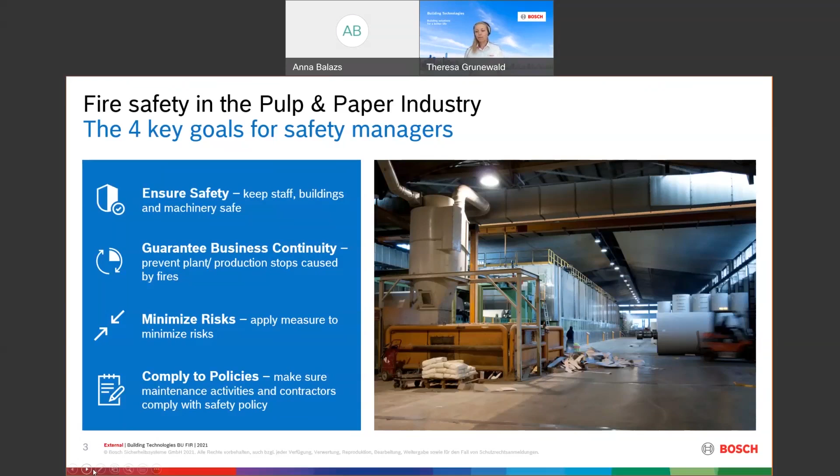To give you a better feeling of what people told us, I've got two quotes with me. One quote is from our official reference, a paper company in Ecuador, IncarPalm, where the guy talked about business continuity and long-term cost savings, and hence installing a cutting-edge technology to detect fires. And yes, he is right. We were talking about business continuity. If you have a system installed in your company which can monitor fires early, it's better for business continuity and also for your long-term savings.

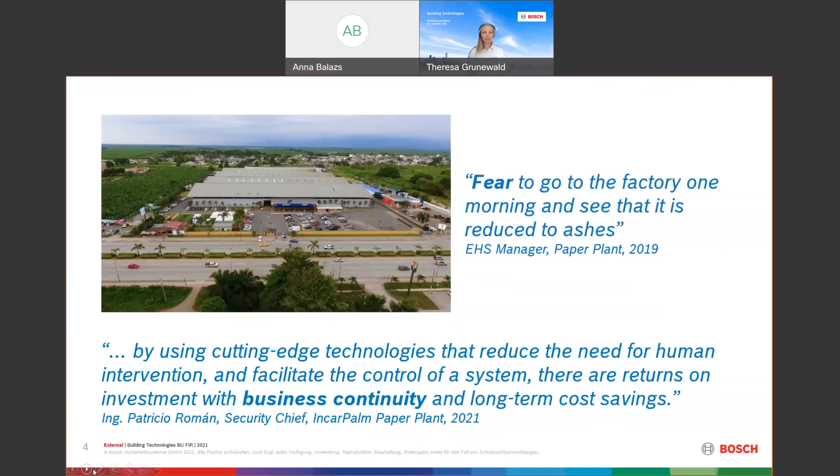And then there's one quote a guy said to me when we visited him for a demonstration on site. He said, Theresa, you know, every time I go to bed in the evening, I have the fear that when I go in the morning to my factory, it's his own factory, it's reduced to ashes because of a fire that was not recognized. He said that for him, it's the highest fear he has. So he wants to have it safe also during the night when nobody is working in that area. Just two quotes and a picture to show you that this really is a fear and also a goal for the industry and the safety managers inside.

Let's have a look: what are the risks really, which areas did we define as risks, and what did we find out there? We split up the industry in 3 sectors. On the one hand, the production area. In the picture, you can see a big paper machine. And on that paper machine, you've got all the paper wheels, you've got wood chips running on conveyor belts, and it's getting hot because it's moving.

It's static electricity, it's just moving. And then you've got the paper, the wood chips on top of hot surfaces, for example, and it's getting hot. So fires can start easily. As well as that, there can be the chance that somewhere a pipe is not insulated well. So also here, there are chances that a fire can start, a risk in that area.

When we think about the second part, it's the service area. You can see boilers driven by flammable liquids, for example, but also here we've got cables, we've got a lot of rooms where we've got cables around, and when there's a short circuit and you've got the paper dust around, that's a high chance to start a fire. You've got sparks. If there's personnel welding, maintenance work, those maintenance works can enhance the fire risk or can start a fire.

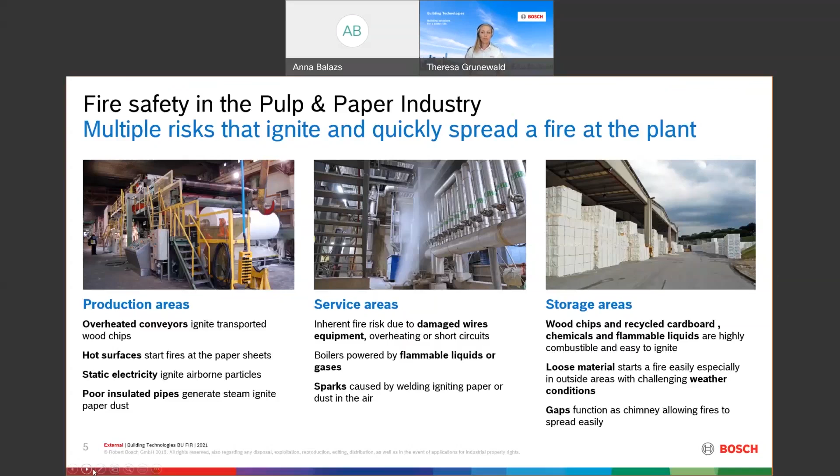It's not new that we need fire detection systems in industries. We've got a lot of different fire systems, designed and dedicated for special areas. So we've got point type detectors for commercial buildings, for example. We've got linear beam detectors. We've got also aspiration smoke and flame detectors. Those systems work perfectly where they are designed for, but they've got one challenge: smoke and heat need to reach those detectors. And if they don't, they cannot detect. It's just not possible for them.

And when we think about the pulp and paper industry, we might have 3 specific challenges for standard fire detection solutions. One is the high fire load. But why is that a challenge for a fire detection system? It's easy to ignite a fire, and when the fire started, it's spreading very, very well. So it's fast spreading, and therefore we need a fast reaction, right at the source. This is where we see a challenge for standard fire detection systems, because they depend on the ceiling height, on the smoke and the heat to reach the detector. So it's not as fast as we need it.

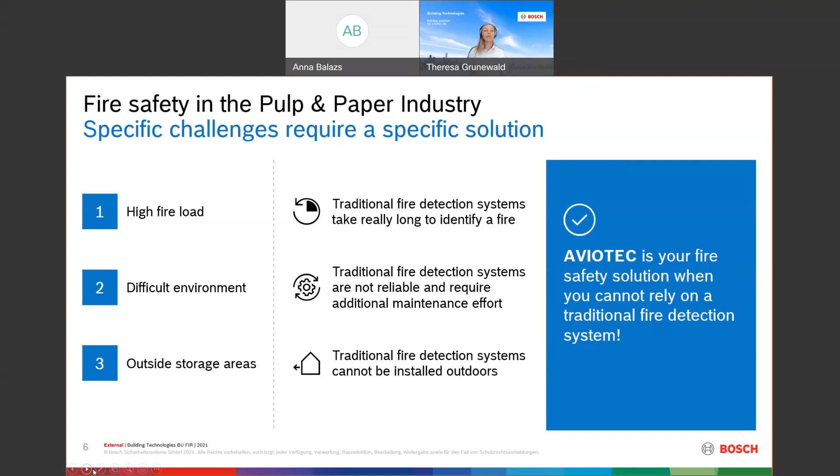Let's see which use cases we have for those challenges in the pulp and paper industry. A machine has a high fire load. It's getting hot, and there is electricity inside. So when a fire starts at that machine, it is important to recognize it early enough, so maybe I can already go there with a fire extinguisher and extinguish it. The damage is low, and you can keep producing with no interruption. When you have to wait for the smoke and heat to reach the ceiling, it takes much, much longer. That is challenge one, the high fire load combined with the production area.

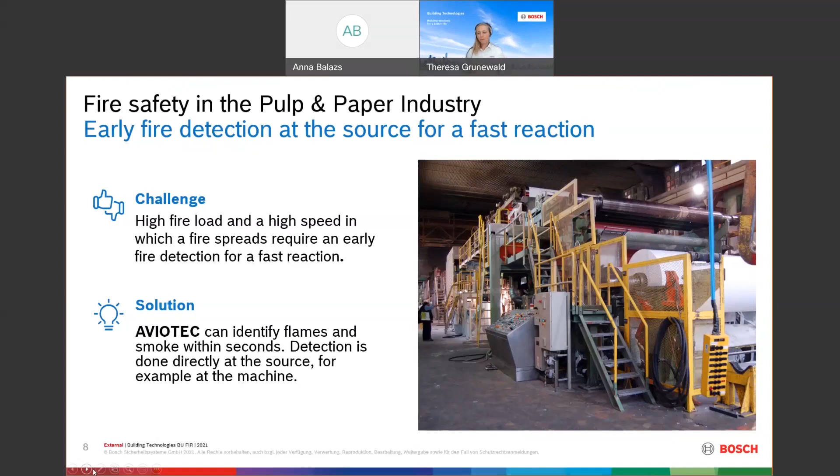The next challenge we have to split up a little bit. Difficult environments cause problems for standard fire detection systems to work efficiently, and there's the maintenance effort. First, the smoke is sucked into the detector. I think about aspirating smoke systems: there's dust in the air, it's sucked in, you've got dust in the pipes, and it may cause a false alarm, which we don't want. If you install AVIOTEC in a housing, you don't have that problem anymore.

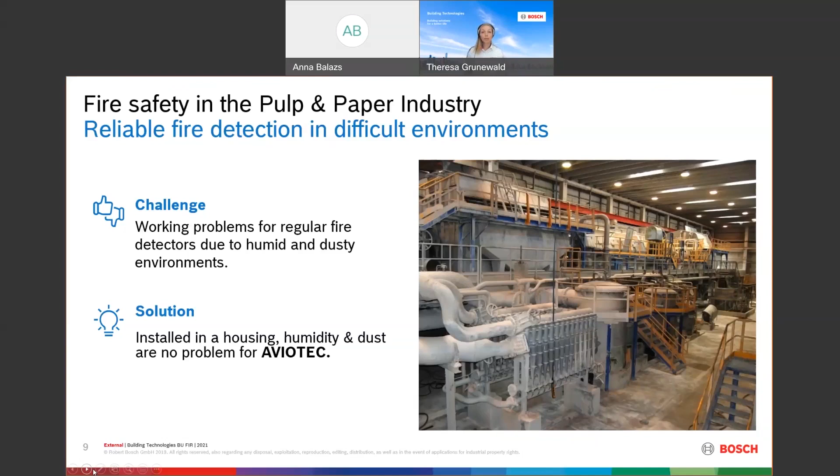Next point: in difficult environments, the maintenance effort for standard fire detection systems is much higher. Those pipes you have to clean maybe every second week. One customer said, Theresa, it's not sufficient to put those pipes in, because I have to clean them all the time and it's more work to clean them than they do to detect fire. I really don't know what to put here. So we said, okay, let's do it with AVIOTEC. Installed in a housing, the dust is not a problem for it.

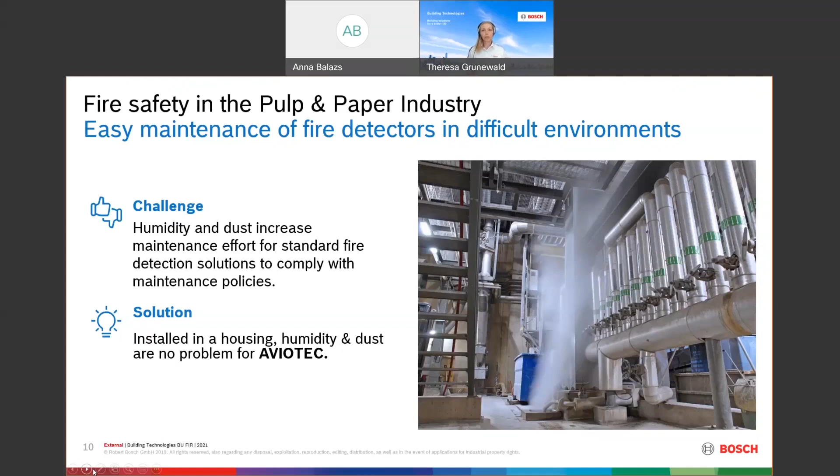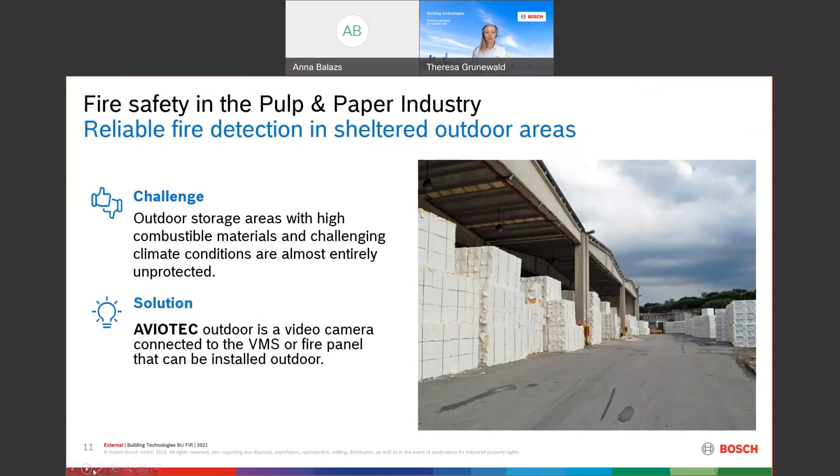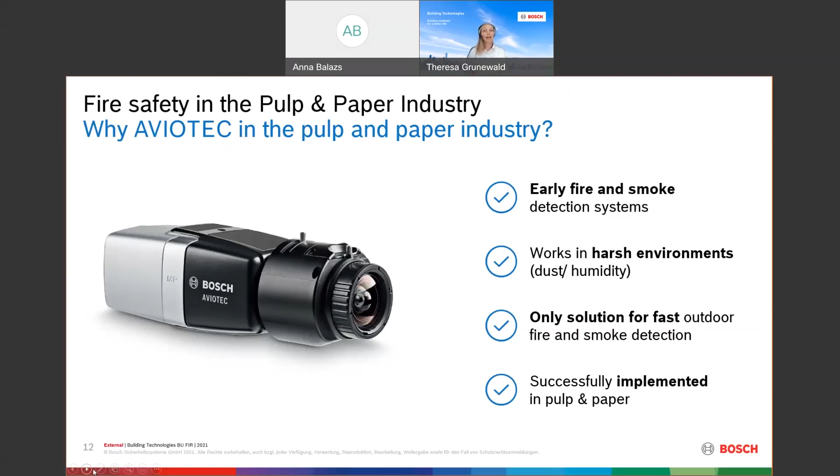I was talking about that one reference, and I will also go through some use cases at the end, but maybe there are some participants on the call who don't know what AVIOTEC is doing and how it works. So how does it work? I hope that my slides are working now.

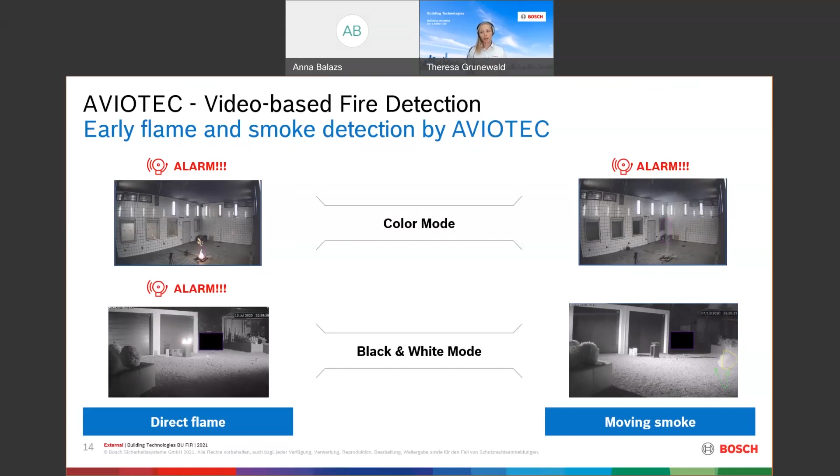So for smoke, we have to say that it takes a little bit longer than for flame detection because there's more analysis happening in the back of the camera to verify that it's really smoke in this case. Now what you can see is a really small rectangle - let me stop it shortly so you can really see it. Here is the yellow rectangle, and that small rectangle shows that the alarm was triggered.

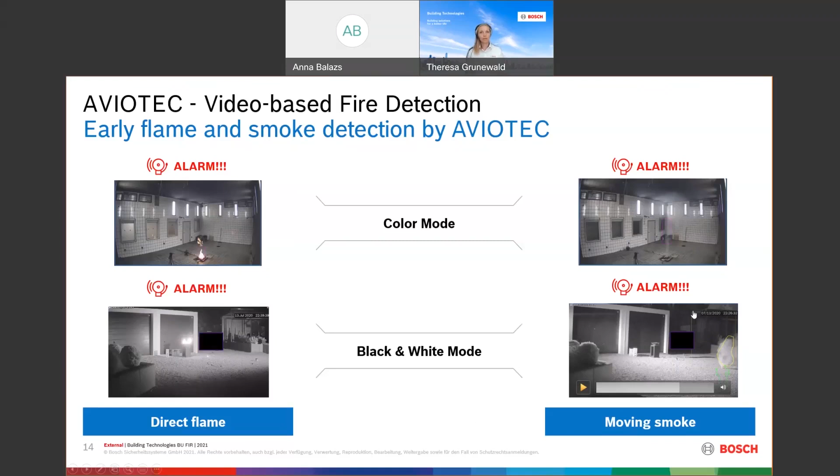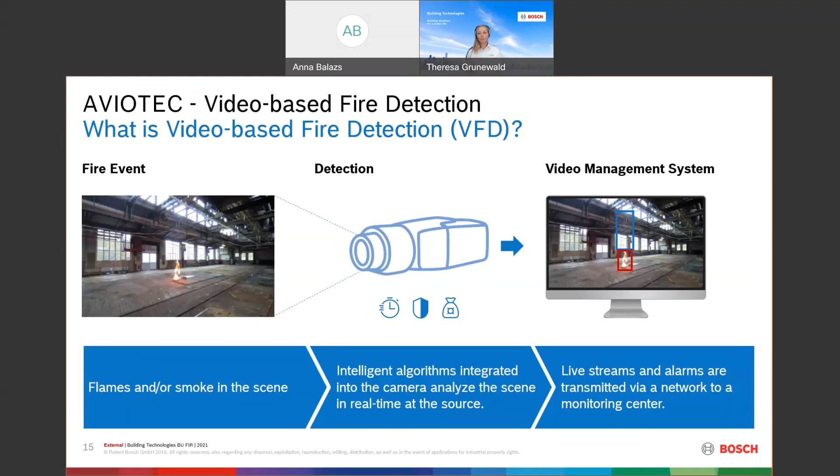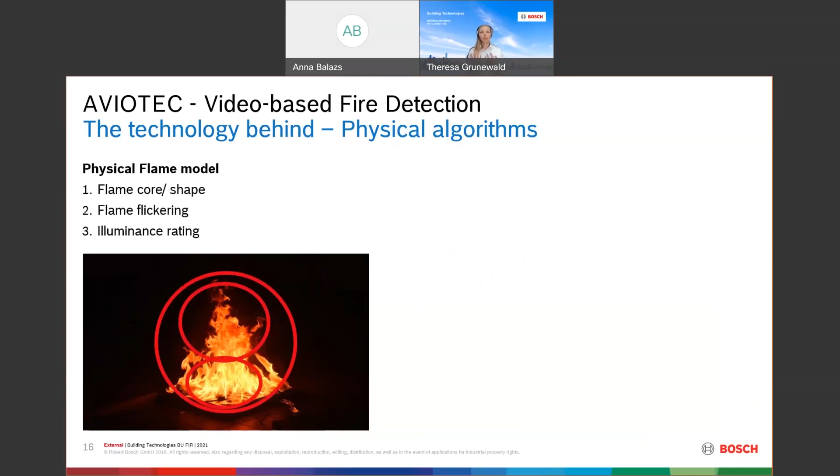Let's shortly have a look at how the physical algorithm is working. So AVIOTEC is detecting visually. For flame, we have the physical flame model as the basis, so it's covering the flame core, then we've got the flame flickering, and all in all the flame shape. And this is then combined with an illuminance rating, where on top and at the end it determines that it's a flame or not.

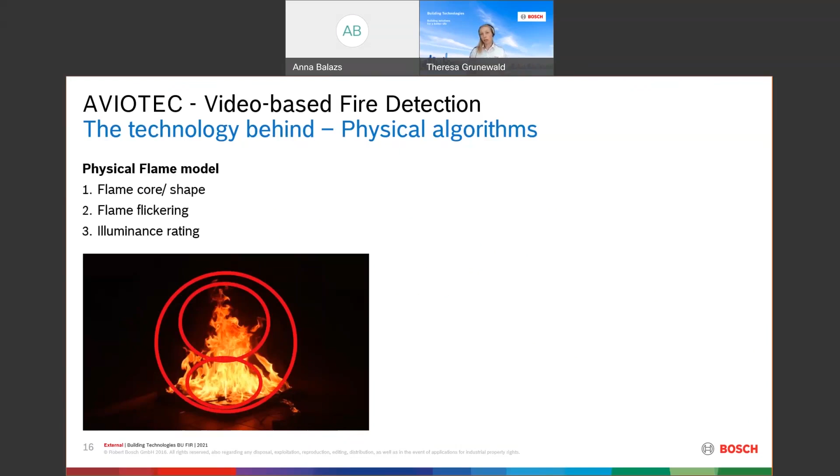For smoke, we have the same - it's also a physical smoke model. And this physical smoke model tells us that smoke is the motion of half-transparent to transparent objects in front of a background, and this movement is going to be detected by AVIOTEC. It's not only upwards, that's the model - it's also moving sideways or a little bit more disturbed, but this is what AVIOTEC is detecting. And it can then also distinguish between uprising smoke and moving objects in that case.

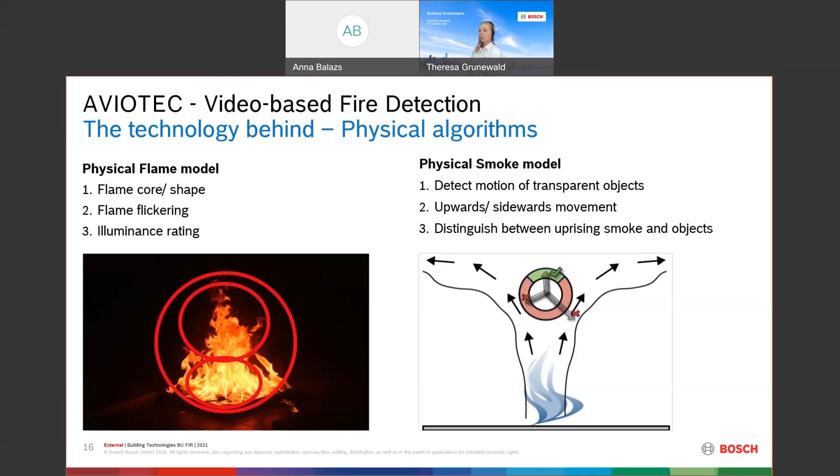But that's not the only thing we have in the AVIOTEC. It is developed all the time. Since 2016, we did a lot of releases developing and enhancing the algorithm. What came on top now to this physical algorithm input is that...

Am I back? Yes, we lost you again. Please repeat this, your slide, last sentence. Yes, I'm really sorry, I took all measures I could for the internet, but okay, it's home office time, so everything's fine. I like to tell it more than once.

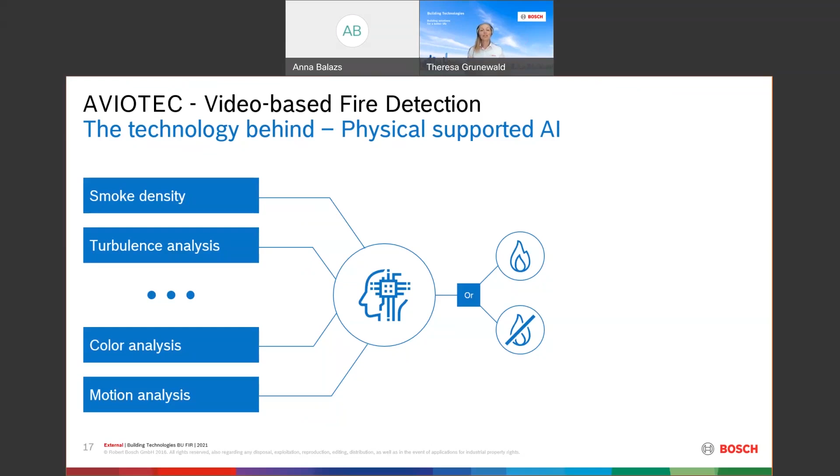So algorithms inside the AVIOTEC, detecting smoke density, turbulence analysis, all of that. And this is going into an artificial intelligence, and the artificial intelligence helps decide whether it's a flame or smoke or not. This enhances us and gives us the chance to have the minimum illumination level reduced from 7 lux, where it was before, to 2 lux. And also to have now this 0 lux opportunity where we just install infrared illuminators, so a black and white mode. And the result, sure, we are every time looking for having a higher detection range.

So detecting fires maybe which weren't able to be detected upfront because the smoke was just too fast, or the flame was not that visible. So false alarms which came through sometimes are now reduced as well. And that's every time the goal: getting input from the market to then analyze and reduce the false alarms as well as enhance the algorithm to detect more and more. And that was possible in that case with the approach of a physical supported artificial intelligence inside the AVIOTEC.

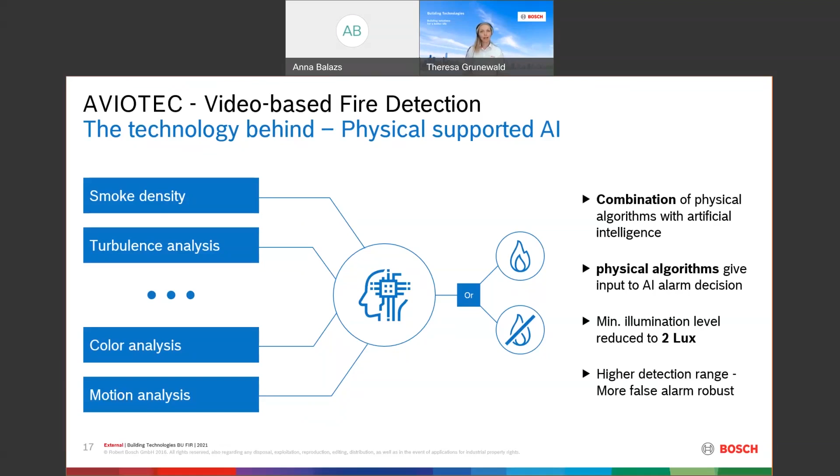Now we are talking about some references. So the IncarPalm Ecuador factory I was already talking about, now we have it here again as a picture. Those guys installed AVIOTEC in their facility because they said we really need an early fire detection solution which can enhance the safety as well as the security inside our factory. They know that fire starts in those factories often and that there's a high risk, as we have seen in the previous slides, for fires.

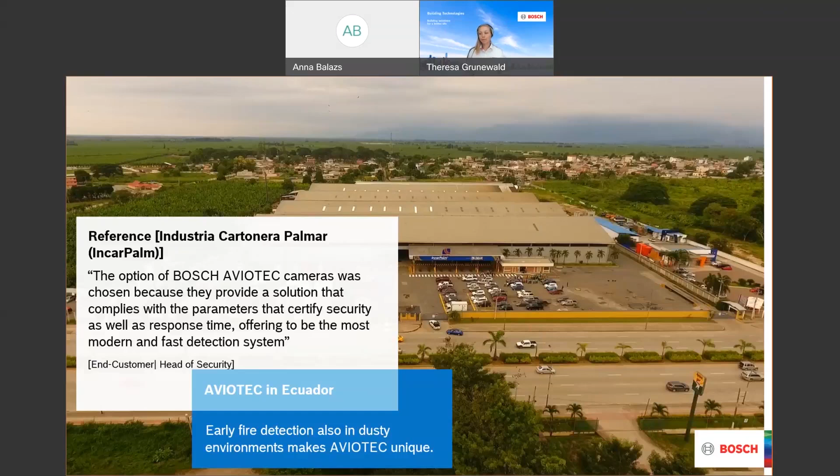So here with the dusty environment, they wanted to have a solution working very well. I'm based in Germany, and I really like to tell also about German references. So this is one company, the Mohn Media Print Factory. They are printing a lot of material, and they've got a headquarters. And in that headquarters, they have a waste paper storage. That waste paper they are using to create other paper.

So I'm not telling you that because I like it, that it's a German reference—I really like the approach they had. They had one installation of AVIOTEC where we saw a video. And that video gave them the input that how they really created the place where the waste paper is stored might not be the best one.

They've got glass ceilings. There was one time—you can imagine they've got those big paper blocks, waste paper blocks stored, but there it was just some paper scraps happily on the floor. And the sun was moving, and it made a small yellow, really centralized point on the bottom. Then it was moving, and in the time lapse you could see it was moving a little bit more into the direction of those paper scraps. What happened is that this really, really high temperature sun, in that case, started these paper scraps to smolder.

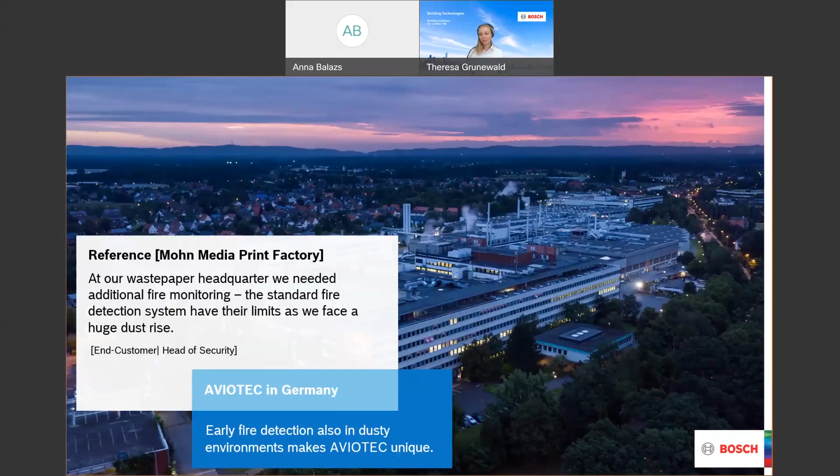One other nice approach is a cardboard mill with an automated storage. The shelves move depending on the height of the packages going in with a robot. An insurance inspector came and said the sprinkler at the ceiling is not enough anymore, you need a sprinkler at every single level of the shelf.

The customer said no, I cannot do that, it's much too expensive. Also, if a package is higher than the shelf is adjusted to, the sprinkler heads get broken, and then you know what happens: the water is everywhere. So they said, no, we are not doing that.

So we started searching for another insurance company. But the insurance company said, no, please stay, we are looking for another solution. And that's why AVIOTEC came into place here.

We did some tests, and we found out that the insurance company, the end customer, and the fire brigade of that facility were really happy with the solution. They really saw the benefit of having an early fire detection solution inside their warehouse.

This is how the insurance company said, okay, you don't need that sprinkler system anymore. The fire brigade has the video from the camera on a tablet, so they can directly see and monitor what's happening and know what to do in case of a fire. That's a really nice approach in that case.

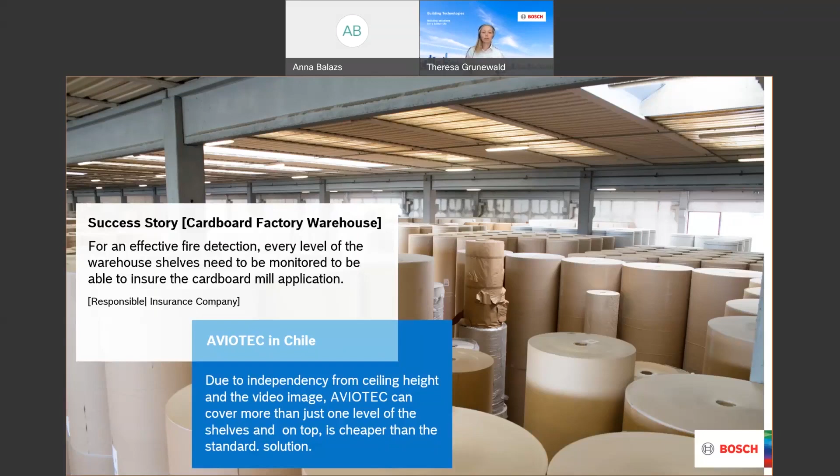Last but not least, the outdoor solution. I don't have an official reference or use case for you right now because it's not released yet. So it's coming, and that's our main release this year.

We've already done some proof of concepts with customers in outdoor storage areas, in places where they have issues getting fires recognized early enough. That's the case we see in the future.

That's also what the Ecuador guys said to us, asking if they have an outdoor storage, is AVIOTEC working there? And we said, not yet. This is what we worked on, so now we can go to them and say, yes, now it's working. We can enhance their overall security and safety solution with more AVIOTEC in the outdoor area to store even the materials and goods they have there.

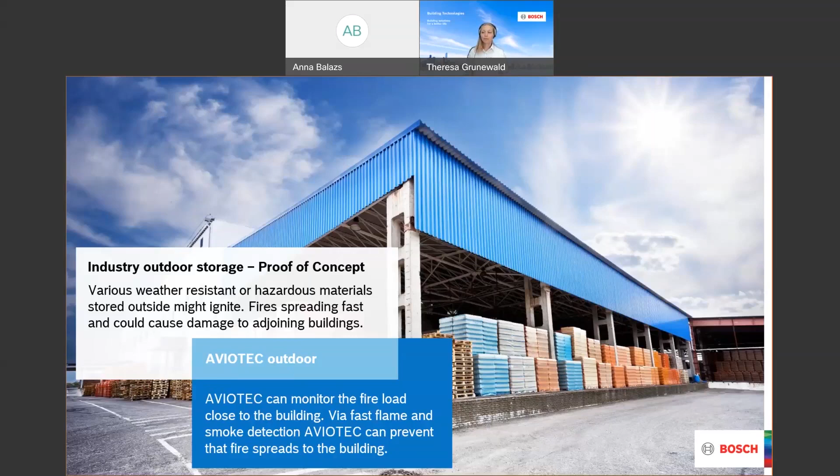So right now, I would say... we lost Theresa again, but she's coming back. I'm going to be reconnected. We can hear you now. I'm back, okay, yes, so yeah.

Good, so we are really happy to explain AVIOTEC even more in detail. That was just a rough overlook of the real features. We've also got intelligent video analytics inside. But what I want you to take out of this webinar is that there are dedicated areas, dedicated risks, and dedicated challenges where AVIOTEC gives you a really good solution and an enhanced system to make your end customer, or even yourself if you are the end customer, more safe against fires.